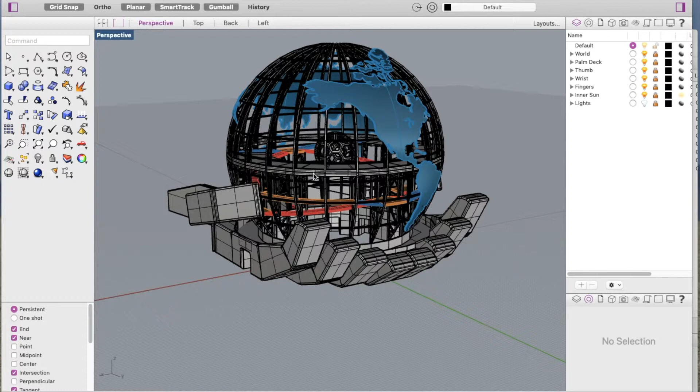This is the model as it came from the client, and this is where we're going to start. So first of all, we're going to get rid of the world here because we don't need it. And same with the Inner Sun here, we're going to get rid of that. All we really want are the hands. And we definitely want the ramps too.

So essentially what we're going to do, we'll come from top view, actually left view, is we're going to set up a plane, just a normal surface, essentially a rectangular surface, and we're going to move that surface in increments up through the hand.

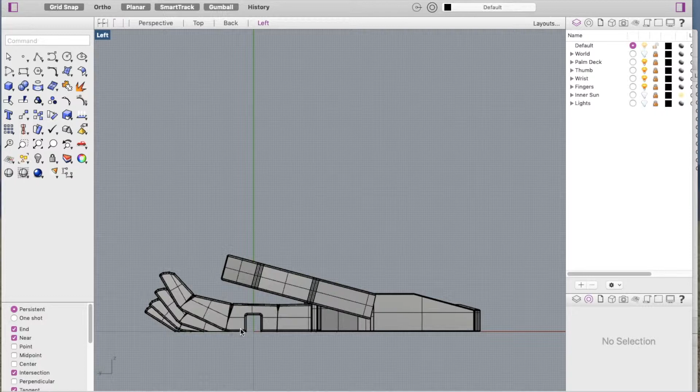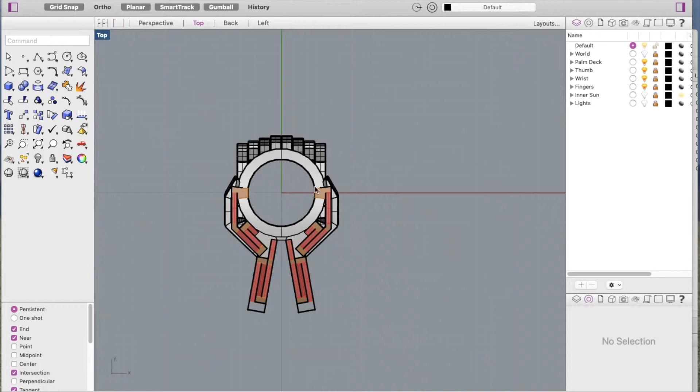And as we do that, we're going to take a section of each increment, and once we take a section of it, we're going to move it down here so we can trace the parts that we want, and then we're going to take our tracing and extrude it to make a representation of what our profile cuts will look like. So without going too much further into it, let's get into it.

So what we want to do first is be able to select everything in order to make a section. So we want to unlock all these layers. So I'm just going to go down here and expand all layers. And I already know that we don't need anything from the world, so I can close that. Okay, so let's just go through here and unlock everything that we want in the drawings.

Now these curves, these are backups. These are just the curves, the profiles essentially, that were extruded to make parts of this model, so we don't want those in there. So we'll just avoid unlocking those, and those are turned off anyways, so we won't be able to select them, which is good.

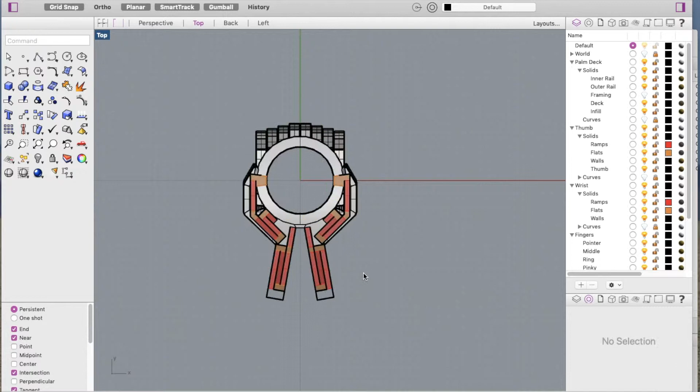Okay, so that's great. Everything is unlocked that we need unlocked, I believe. So let's just see if we can select everything here. It certainly looks like it. Okay, so now what I want to do is create some new layers down here. So one layer we're going to call, let's see, what do we want to call this one? This one is going to be

2D cuts. So that's where we'll put our slices, our cuts for the hands here. So then we got 2D cuts, and then we're going to want another layer for the hand slices or hand traces. So we'll call that hand traces. And then we're going to want one more layer for our extrusions, our actual 3D representation. So we'll call it 3D hand traces. Okay, so that's good enough.

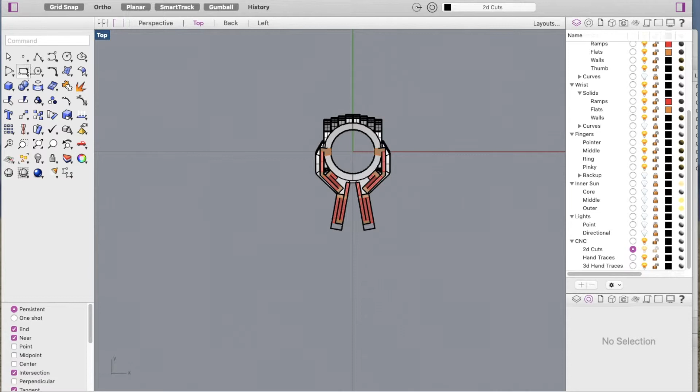And then just to make this a little bit more organized, let's add one more layer here and call it CNC. And then we'll take just these layers that we just made and put them underneath that. There. So when we open CNC, we have all these layers here. So the first layer we want to work on is 2D cuts. So we'll select that layer, make sure we're in top view, and we're going to make a surface.

So I'm just going to make a rectangle here that encompasses everything that I want, and then I'm going to select it and make it a surface from planar curves. And what I just did there is a process that we're going to do quite a bit, making solids and surfaces and so on and so forth from planar curves. So there we have it.

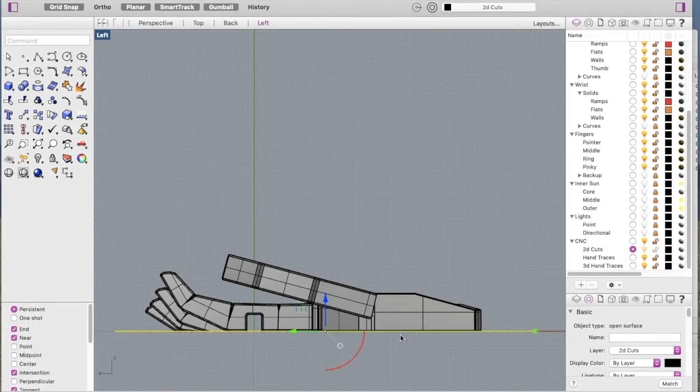There's our surface. Now we can select this. I'll select the curve and delete it because we don't need it and we don't want to move it through our model. So if we come down here and we look at it from the left view, we can see that our surface is at 0. It's at the very first, where the very first slice will happen, which is exactly what we want. So now we can come back over here to top view.

We'll select everything here, and we'll type in the command Section. What that's going to do is automatically trace anywhere where the model's geometry intersects with this plane's geometry. And so what it gives us is a nice cutout, basically, of wherever this plane is. So the first part of the command, you just type in Section and select what you want a section of. So you select the plane and the model. So that's what we want a section of.

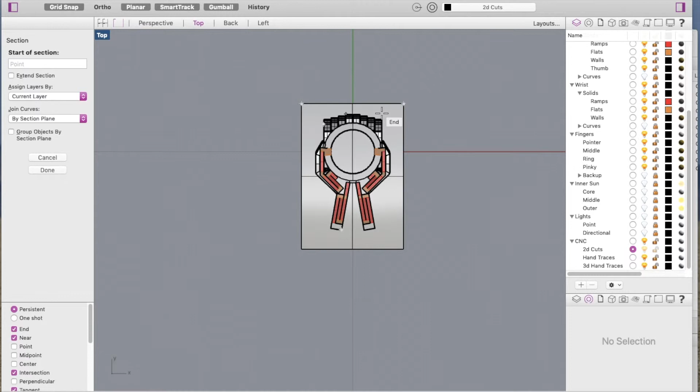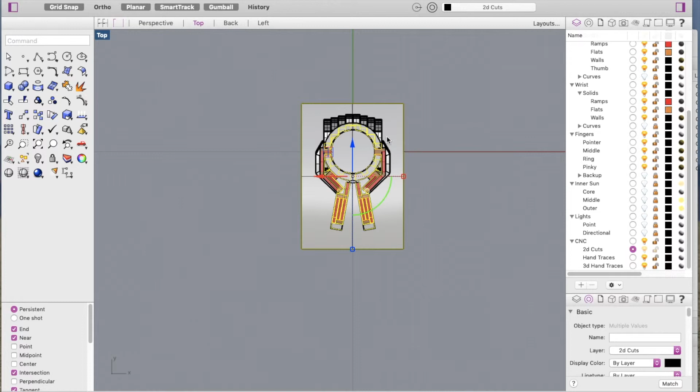Great. And now it's asking us where the section is happening and what plane. So to do that, you must come to a different view here. It could be back or left or whatever, and select your plane that you made, your cut plane essentially. Okay, so that's where we want to cut, and then we press enter to make the section. Great. So now we can come back up here to top view, and this is where we start to set up our area.

So from top view, we can just click on this gumball arrow. Make sure that gumball's on up here. I'll turn grid snap off and smart track and planar, all that off for now. So we're going to select this gumball, and we're going to move this. We want to move this a set distance that we're going to use every single time, so that when we move this down here, we can align our pieces up easily, and you'll see what I mean a little bit later.

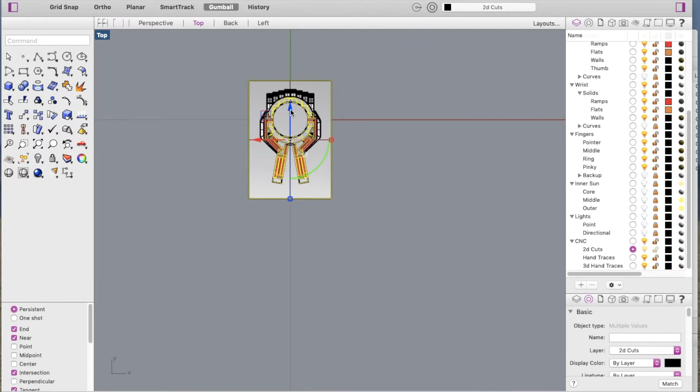So what we're going to do is move this down. Let's say 250 feet, just because I know already that that's about a good distance, but we want that to be negative actually, because it's going in the opposite direction of the arrow. So we hit enter, and there is our section cut of this model.

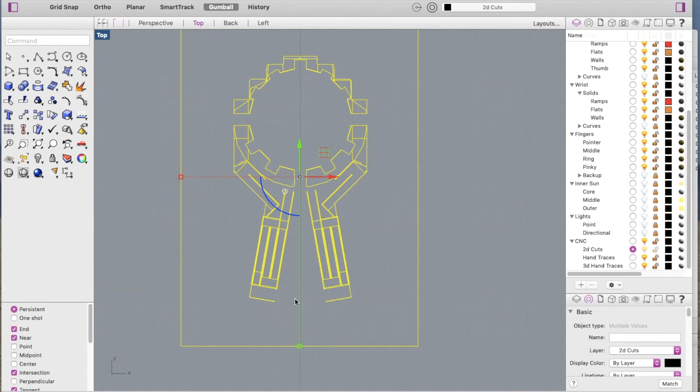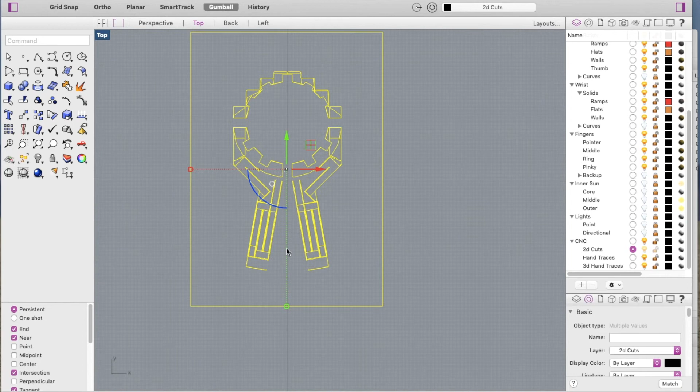So if your model were drawn really well, or if it were simpler, if you were just taking a cut of a box, whatever you had as this section cut would be good enough. These curves are all planar. It would be good enough to make a solid extrusion. It would be good enough to cut just as is. Our model here has got a lot of things going on, and some things that we don't necessarily want to bring over to the finished product. Some details that we don't want in there, like, if we sent this to a CNC, it would try to cut all these lines and it'd be a huge mess.

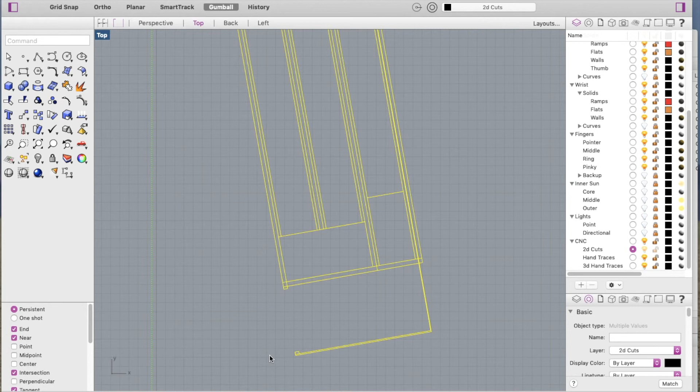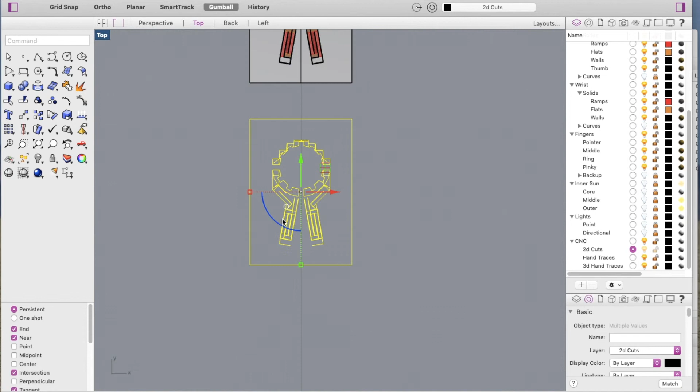So what we want is a profile of all this going around and so on and so forth. We're going to get rid of that. I don't actually want these notches, these alcoves in the model that I'm making. So I know some of these things already that I don't want to be aspects of the project. So I'm going to trace this in such a way that eliminates all of those parts. In the next video, I'll go over exactly how I trace this and manipulate this.

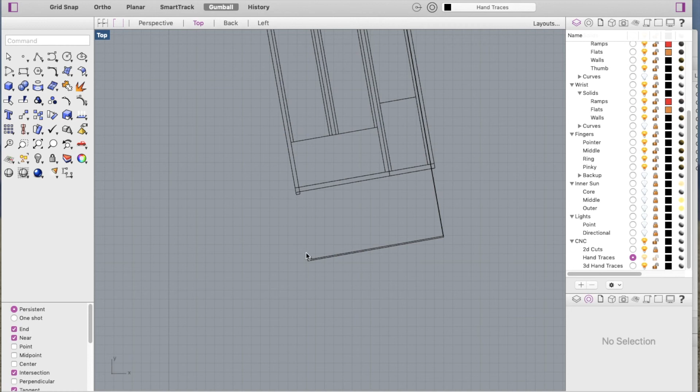But essentially, what we're going to do is take this here, and we actually want to lock it, right? So we're going to go over to hand traces. We're going to lock this, and then we're going to start to trace this. This is a simple process because it's on the y-axis here, so we can just trace half of it and then mirror it. So that's what I'll end up doing. But in the next video, we'll go over that.